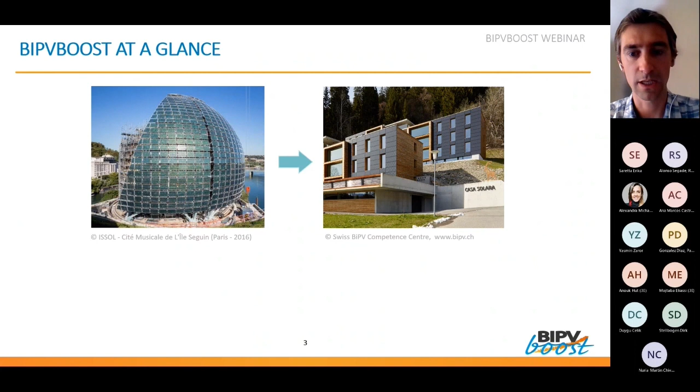So at a glance, what we aim is to move from iconic BIPV towards the mass adoption of the technology in all segments of the construction sector. We have nothing against iconic BIPV, but we are aiming to produce impacts that will allow the adoption of the technology in all segments, not only in this niche segment, but to extend the possibility of integrating photovoltaics in the residential, the commercial, and also the industrial segments.

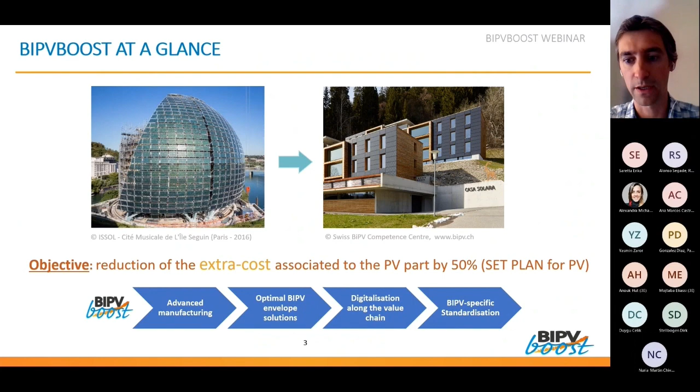The main objective is to reduce the extra cost associated to the PV part by 50%. It is an objective that was set by the SET Plan for PV, and this is the main ambition of the project. So we propose a holistic approach of different cost reduction strategies along the value chain, starting with advanced manufacturing, following with the development of optimal BIPV envelope solutions, the implementation of digitalization strategies along the value chain, and also covering standardization activities for BIPV.

So I will now present the main project results. The first one will, of course, be the flexible manufacturing line for BIPV. We developed a new flexible tabber stringer for crystalline silicon technology, which provided enhanced flexibility in design, high productivity and quality, and ultimately a module cost reduction. We have an automatic string layup, which can accurately and freely position strings onto the module glass. In this case, we can go up to XL formats, 3 by 2 meters.

We have also the possibility of implementing inline quality control strategies at string and module level prior to the lamination step. And we can work in two operation modes, standard and customized. With the standard mode, we can work at a higher speed, but less flexible. And with the customized operation mode, we can be much more flexible at a slower speed, and we can have customized string length. We can play with different cell distances, even inside the same string. So we can deliver highly customized modules at a competitive cost.

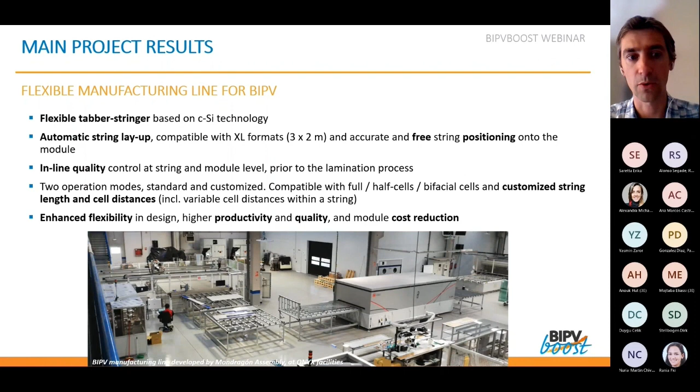The second main project result would be the portfolio of low-cost and aesthetical BIPV solutions. In this case, we have 4 main contributions. The first one on the development of advanced glass-glass BIPV solutions based on crystalline silicon, back contact, and amorphous silicon technologies. We have also the contribution from PIZ, an Italian company, which has developed a multifunctional BIPV facade cladding system with integrated insulation.

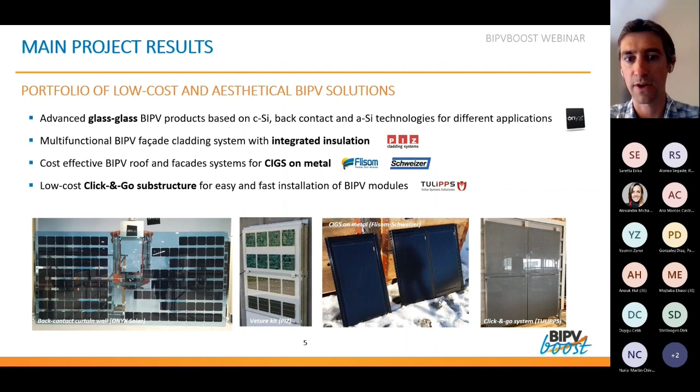Then we have also the collaboration between Flisom and Schweizer, both companies from Switzerland. In this case, they have developed a CIGS on metal solution compatible with facades and roofs. And next, we have the low-cost click-and-go substructure for easy and fast installation from TULiPPS.

Next, we have data-driven strategies for cost reduction along the value chain. This is basically the topic of the webinar today. We will be presenting the contributions from EnerBIM, 3E, Tecnalia, and SUPSI on this field. The first one from EnerBIM on the progress of their software tool, BIMsolar.

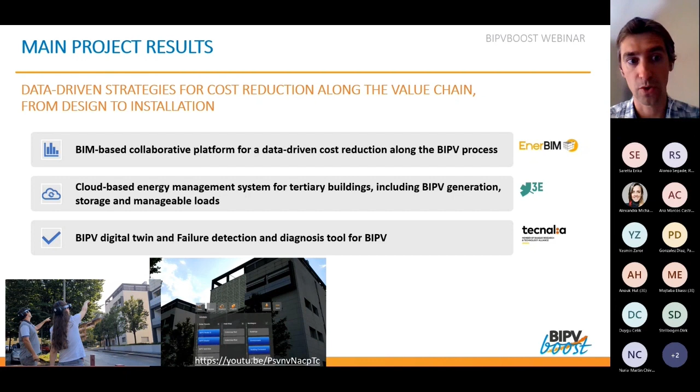The second one, as I presented already, on a cloud-based energy management system for tertiary buildings. And from Tecnalia side, the BIPV digital twin and failure detection and diagnosis tool. And SUPSI will present the augmented reality tool, which was also implemented in BIMsolar from EnerBIM.

Next, on standardization, this was one of the topics that we worked on during the project between SUPSI, Tecnalia, and CSTB. As a result, we proposed new combined photovoltaic and construction testing procedures, including also the development of specific equipment for these testing procedures. And we worked on 4 topics: energy efficiency, energy performance in non-conventional scenarios, mechanical performance, and fire reaction for BIPV.

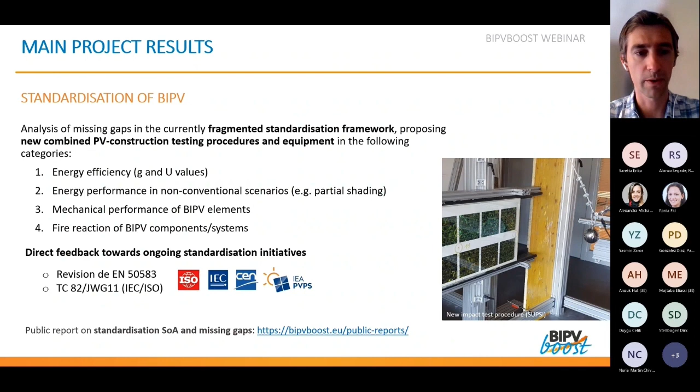As a result of this work, we have produced new testing procedures in each of these topics, and we are in direct contact with ongoing standardization activities. So in this case, we are in touch with all these ongoing activities and are now in discussion, in some cases, proposing the implementation of these new testing procedures in some of these new standards. There's available material in the public repository of the website. I will have a slide on this next.

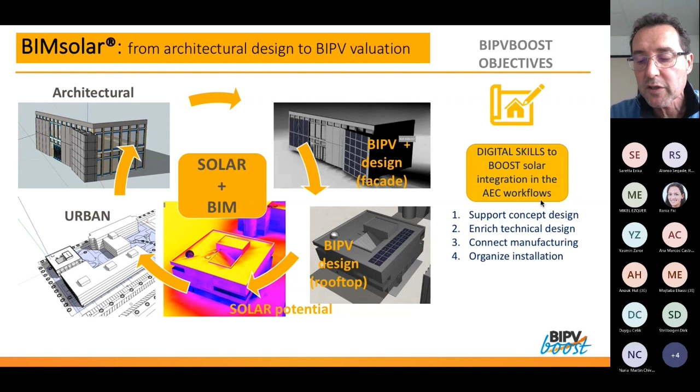The main target of BIMsolar is to be a complete solution dealing with urban values, urban shapes, architectural shapes, and of course solar potential, solar energy, and also digital designing and addressing architecture, engineering and construction. So the digital skills were in charge of boosting integration in the AEC workflows for this project. First, with a huge support to concept design. Second, to enrich technical design, so following the reference workflows for the AEC world, connecting manufacturing, organizing the installation, the preparation of installation, and also anticipating operation and maintenance.

First, to address concept design, we developed in this project a brand new tool, BIMsolar panel editor, a full web solution to anticipate the BIPV performance at element level. So you will be able to discover it at the end of the project online for free. This full web solution enables to create materials, transparent glass, colored glass with cells, variety of cells, density of cells, and representative cost and CO2 equivalent weight, and then connected to the later stages of the process. So this is the first innovation.

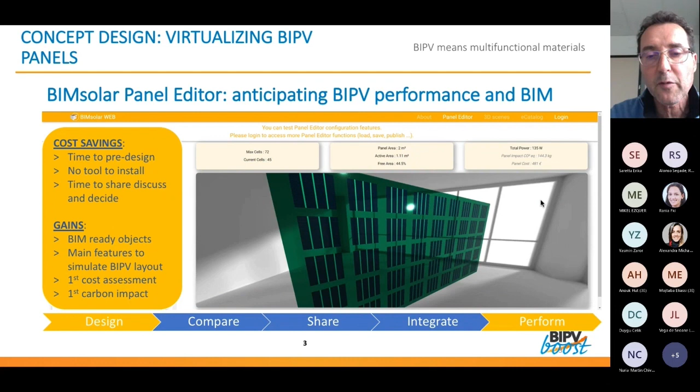The cost savings are, of course, the time to pre-design, the time to choose solution and to compare solution, no tool to install, the time to share and discuss and decide about the choice of materials, and the main gain is to be able from scratch to provide at this stage, the very early stage of the project, a BIM-ready object and BIM-ready catalogs of objects dealing later on with simulation and integration into the BIM workflows. First cost assessment and first carbon impact are delivered at this early stage of the process.

You will be able to find at the end of the project BIPVBoost, so the final delivery will be the official e-catalog of the BIPVBoost solutions as materials and panels, BIPV glasses like bifacial balustrade roof, walkable roof, solar tiles, cladding, insulated cladding. So the catalog is ready and is enriched with these objects and full online.

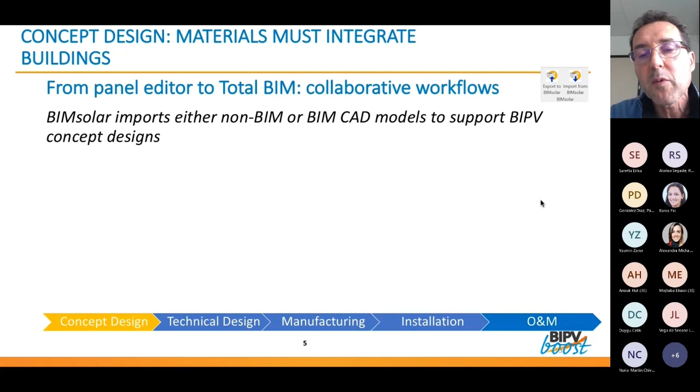From panel editor to total BIM, the collaborative workflows is supported by our desktop tool, BIMsolar, that was enriched during the project. The materials must integrate the building, so BIMsolar imports either non-BIM or BIM CAD models from architecture or urban forms to support BIPV concept design. So the process is in picture of the following. Of course, for this optimal house demo site number 3, we started from the existing roof. We designed with the architect the 3D model. In this case, it was with SketchUp, but also with the Revit BIM solution.

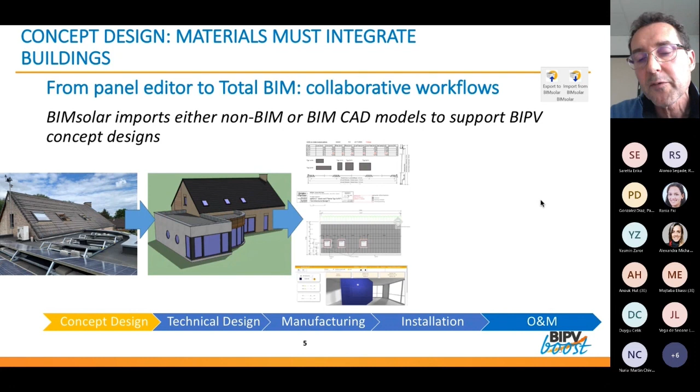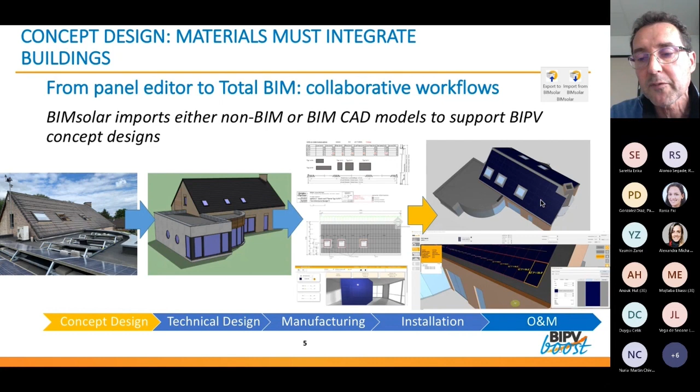Then we gathered elements, information, data to provide the first design of the material, the tiles, CIGS tiles, and then we replicated and simulated the roof with all the key performance indicators to assess the performance of the installation at concept design. So a lot of data, a lot of information gathered in this very early and critical stage of the process. Step by step, BIMsolar desktop enriches the design in 7 steps.

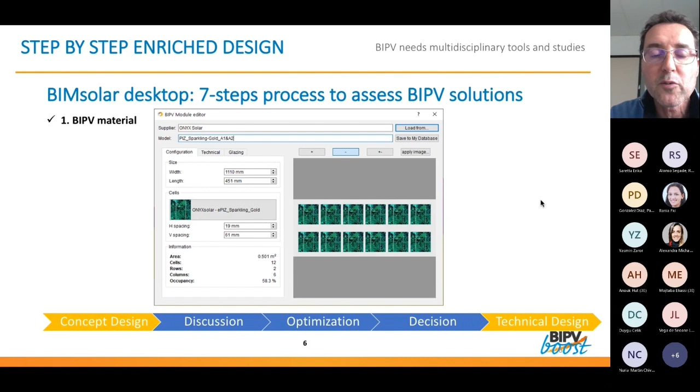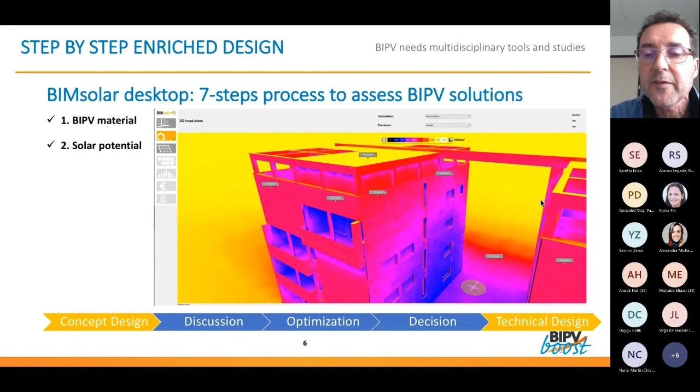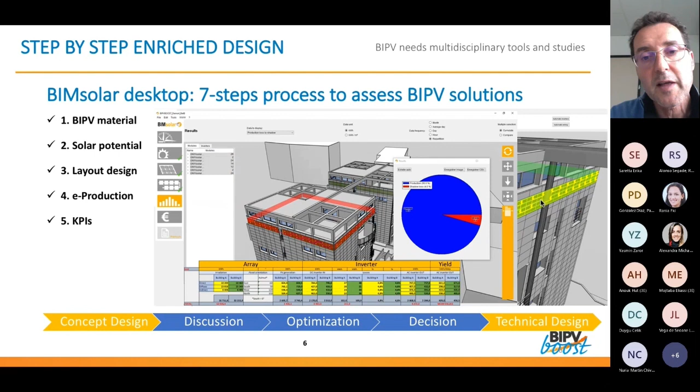The electrical production, connecting strings to MPPTs and inverters, and dealing with all possibilities of stringing and comparing strategies to avoid mismatching effect, for instance, and then the KPIs and a good possibility to optimize and to deal with scenarios like self-consumption scenarios, because we will feature at the end of the project the first prototype of the optimizer engine from Optimal and the Edge HP heat pump consumption model from EURAC.

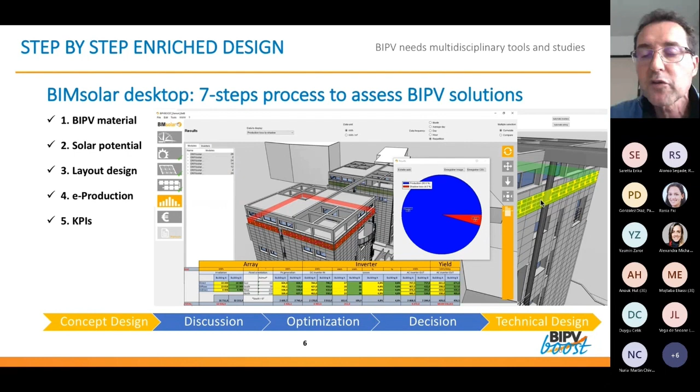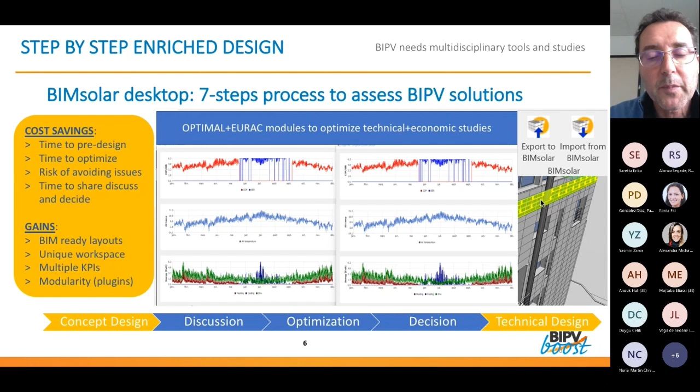So all is connected in one software, connecting panels, materials with the architecture, the 3D model, and you get the results. And this is new, and this was the main achievement of this project, dealing at concept design with the maximum value and also replicating the BIPV enriched model to the BIM solutions. The cost savings are still important in time to pre-design, to optimize, and the gains are mainly BIM-ready layouts, because all that you can see here is replicated in the main BIM solutions, private BIM and open BIM. And the unique workspace saves time and gains in collaboration, of course, and delivery of multiple KPIs.

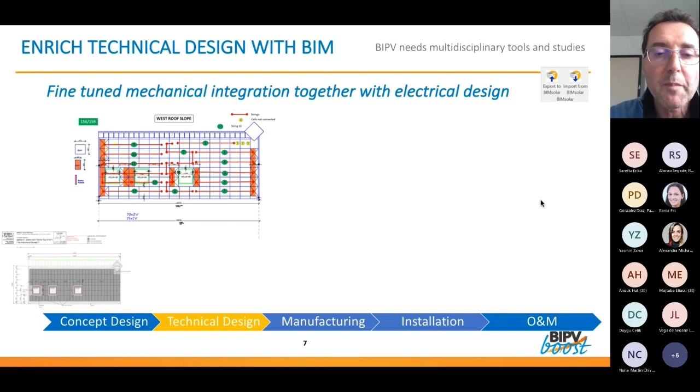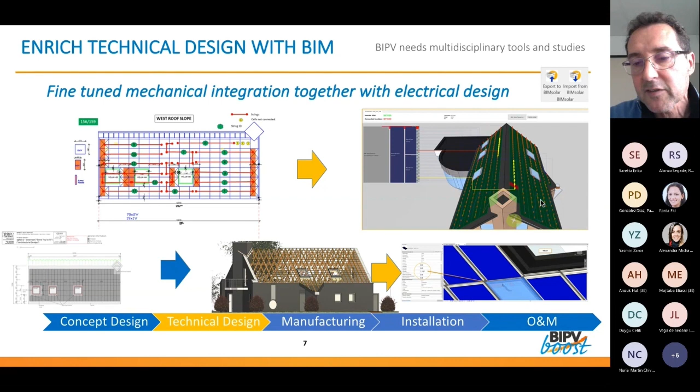The technical design is fine-tuned in the solution from, of course, traditional methods, dealing with a lot of variables, data, but enriched with BIM and 3D designing, 3D modeling, always dealing with high accuracy and a lot of parameters that you can see on the picture between the element level and the building itself, all in virtual, because BIPV needs multidisciplinary tools and studies as a multidisciplinary, multifunctional material.

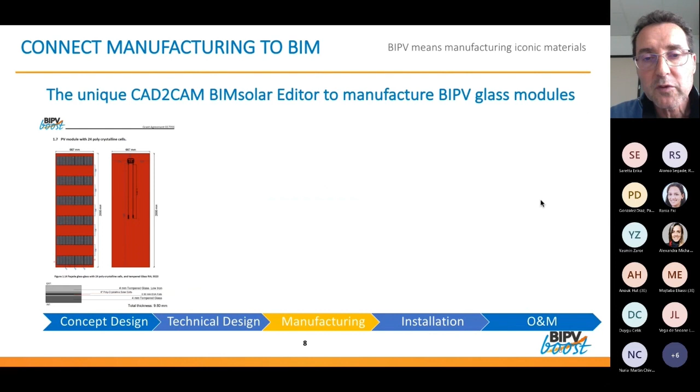Another achievement in this project was to build a unique CAD-to-CAM BIMsolar panel editor to manufacture the BIPV glass that was designed in the same time that the BIPV project was designed. So we can see on this picture that we are analyzing the traditional datasheet from the manufacturer, the producers of BIPV glass.

For instance, this is the Demo 2 glass from Onyx Solar, red glass with a large choice of positions in cells, rows of cells, and then we built a tool able to read the data and translate the data into machine language to launch the fabrication line directly. So it's a kind of design to machine tool. And this was a great ambition. And now we have the first prototype.

Of course, it's highly specialized. It's not a very public tool, but it's connected also to the BIM workspace. So cost savings are here again: time to pre-design, time to optimize, and the risk of avoiding issues with manufacturing. And of course, no delay to share a design with a manufacturer process.

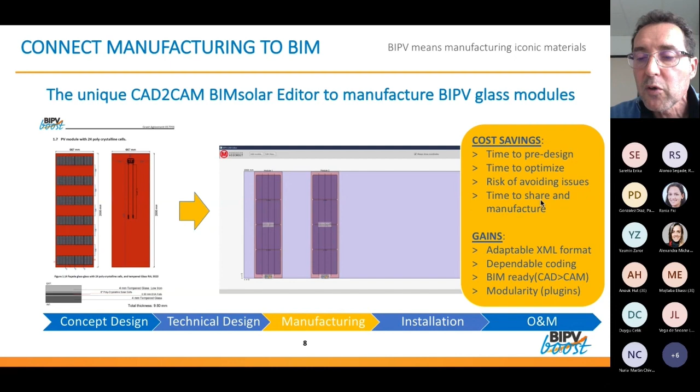And the gains are an adaptable XML format. This format enables the adaptation to every kind of situation of manufacturing, because it's a very easy to handle format. It's not very specific, so you can afford a dependable coding. And of course, you keep the BIM readiness from CAD to CAM.

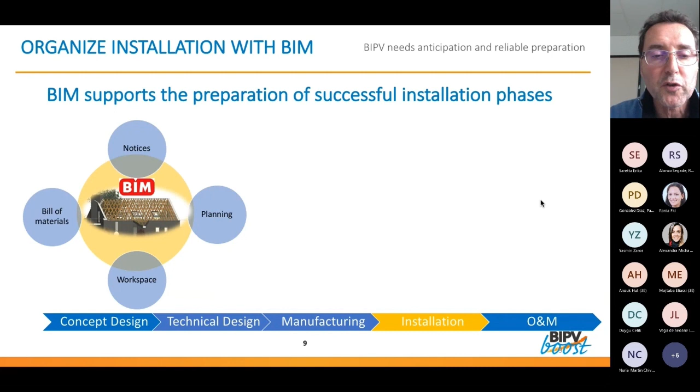Installation with BIM is a question of organization. So this is more traditional, but we supported one demo site in this way, the Optimal demo site in Belgium. We made a full modeling with a BIM tool, Autodesk Revit, that proves that we are able to handle, of course, 3D modeling and dimensions and lots of data between panels,

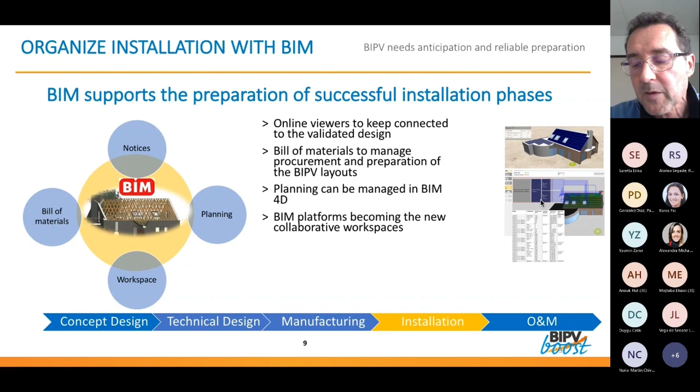electricity, wiring, electricity features, but also the management of a planning and the fourth dimension of BIM, which is time. So the BIM platforms are becoming the new collaborative workspaces, and this is useful and very appreciated to support the preparation of installation of complex BIPV layouts, because you can attach to the BIM model notices and guidelines, and then you can gather all the information in one workspace, and it's a collaborative workspace.

And you can use also 3D viewers, so non-sophisticated information online, but 3D viewers to organize the works on site. And you can report clash detection and report, of course, the contextual issues in real time from the works to the back office.

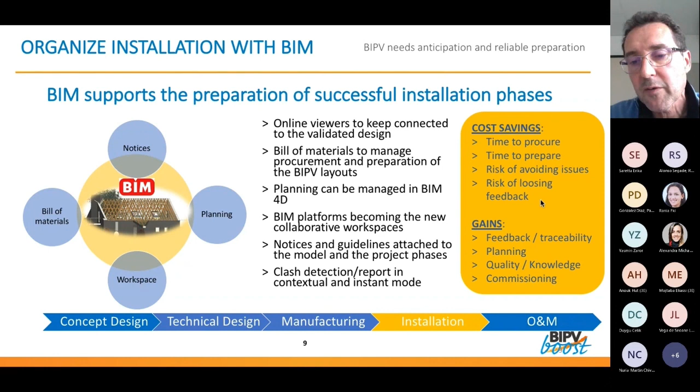So a lot of cost saving in time, in risk mitigation, and gains in feedback, traceability, planning, quality, knowledge, and commissioning, because the models are saved, the projects are saved, and you can access the model online or as a desktop solution with all the enrichment of data, leading to the last achievement we made in this project, the connection of the BIM tools and BIMsolar in particular to digital twin addressing operation and maintenance for BIPV.

So together with Tecnalia, presenting the tool in more detail after me, we are able now to translate a BIPV project from design to construction to operation and maintenance through a kind of simplification, because there is no more the need of a complete 3D, but a more analytical model able to feed routines, analyzing failure modes, and detecting the effects of these failure modes.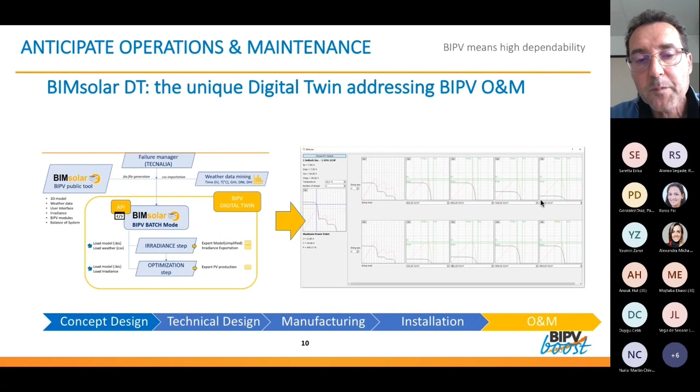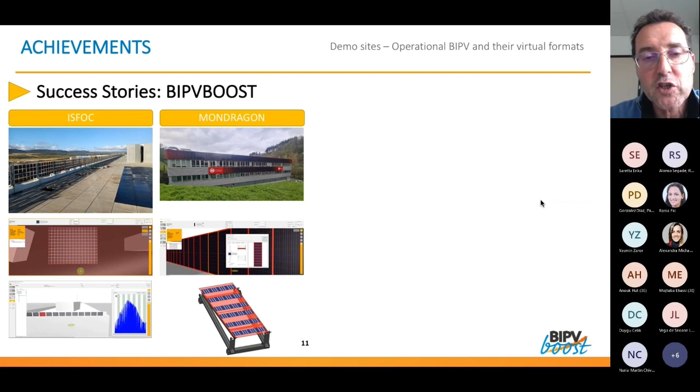Success stories in this project are the demo sites, because we designed, co-designed and developed the virtual significance and connected simulation of each demo site. So you can see ISFOC, Mondragon, Optimal, and PIZ, with modeling in 3D, modeling at element level, innovation in developing families of complex objects like the tulips plus Onyx Solar glass family in Revit,

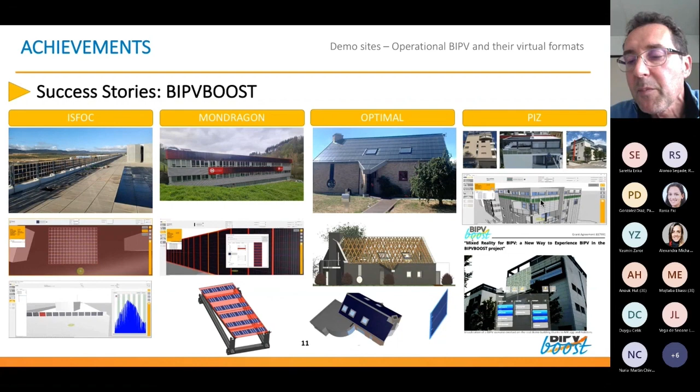And last but not least, we also developed for the PIZ building a virtual mixed reality effort and proof of concept, enabling making choices in front of a building with a large variety of modules and solutions applicable, overlapping on the facade, for instance, in this case. Success story in an open market to finish: the software is used by normal users, not only in the project, but for big or normal projects.

The biggest project today is the Olympic Games swimming pool in Paris, with a complex 3D roof with BIPV panels, not simple BIPV panels, but complex BIPV panels, and sophisticated BIM, and also normal projects like schools and atriums, for instance, on the right of your picture.

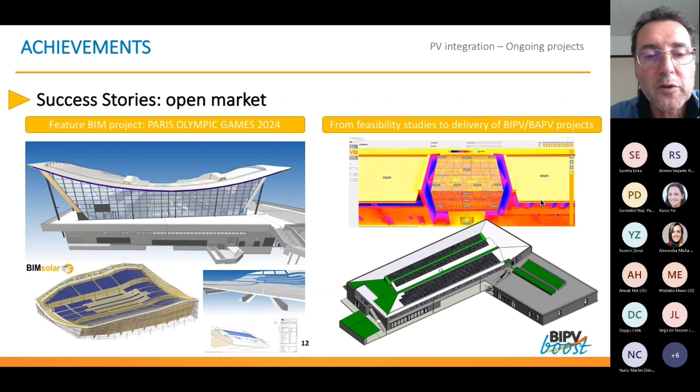As a conclusion, I would say that BIM and the BIM tools are a new paradigm to boost the architecture, engineering, construction, and PV integration, because it can join the traditional processes with a lot of innovation in 3D and in data creation and data gathering, of course, and data exchanging.

Autodesk runs the market with Revit, so it's difficult to avoid Revit, even if we need to go open BIM, of course, but this is not a barrier, I think. So we are developing technologies to be compatible with Revit and compatible with the open BIM, IFC in particular, of course.

BIPV has to BIMify, we think, since the first concept design, because concept design is very critical, with a lot of data, lots of choices to make, and BIM is a strong support to save time and to mitigate risk. Parametric objects are a good opportunity because of their multifunctional character, like the BIPV modules are today, adapting to the contextual situation of the design.

And there is a fantastic potential of savings and gains, because even if the interoperability between tools is still a challenge, the digital workspaces and the teams are progressing and the databases are compatible now. So we can progress a lot and we can prove it in this project.

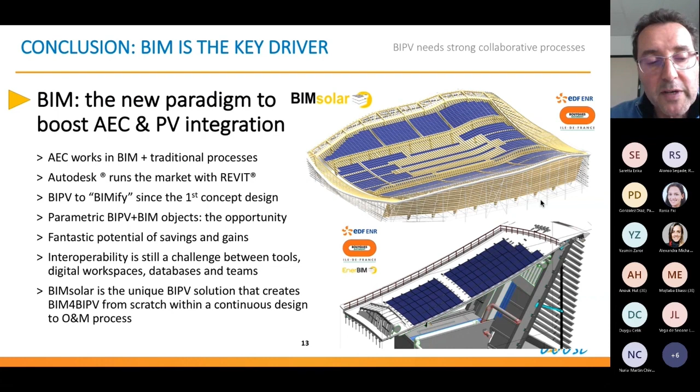So at the conclusion of the conclusion, BIMsolar is today the unique BIPV solution compatible with the tools and the formats, creating BIM for BIPV from scratch, because we can create the modules online from scratch, connected to the architectural works or the urbanistic values, with a continuous design to operation and maintenance process.

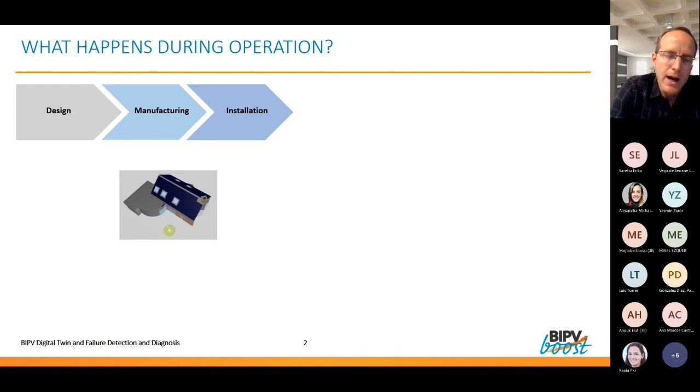In the previous presentation, Philippe presented what digitalization can provide during the design, manufacturing, and installation stages. And now we are going to see what happens after the commissioning of the PV plant. Can digitalization also help us during the operation of the system to improve the profitability of this kind of systems? Obviously the answer is yes.

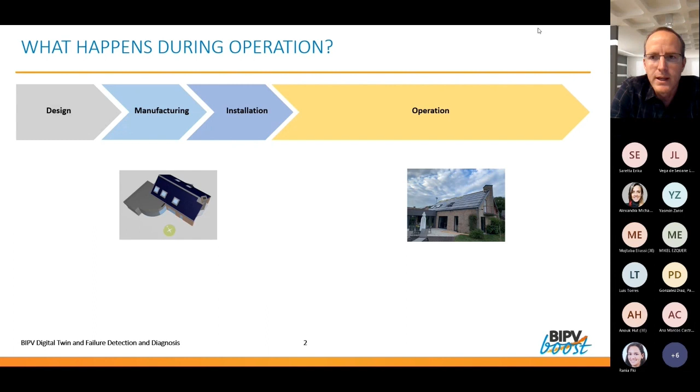We have to take into account that at this stage there is a new data source that is huge: the monitoring of the real performance of the system. And if we apply suitable data analytics techniques to this, we can improve the BIPV model developed in EnerBIM to represent more precisely the real performance of the system. This way we can detect potential anomalies in the system and trigger alerts warning about failure appearance.

Of course, this will lead to better operation and maintenance, because we will reduce the cost of operation and maintenance, as in this kind of systems the inspection techniques on field are quite expensive. And on the other hand, we will improve the performance ratio, because otherwise some failures will go unnoticed.

Apart from this, if we also feed this enhanced BIPV model, representing more precisely the real performance of the system, with weather forecasts, we could offer a more precise BIPV forecast. That is essential in order to implement a predictive building energy management system that will try to get the most from the BIPV production for the profitability of the system. This will be the scope of the next presentation.

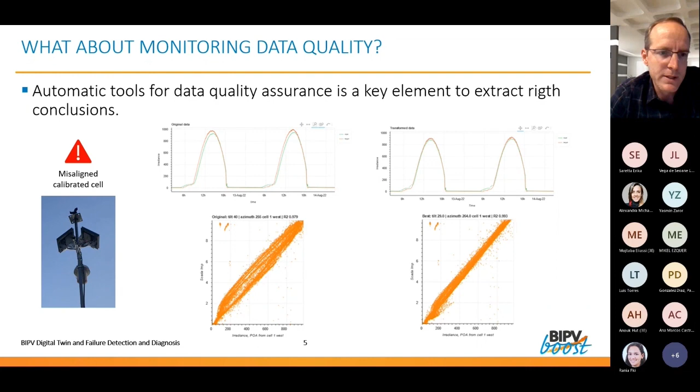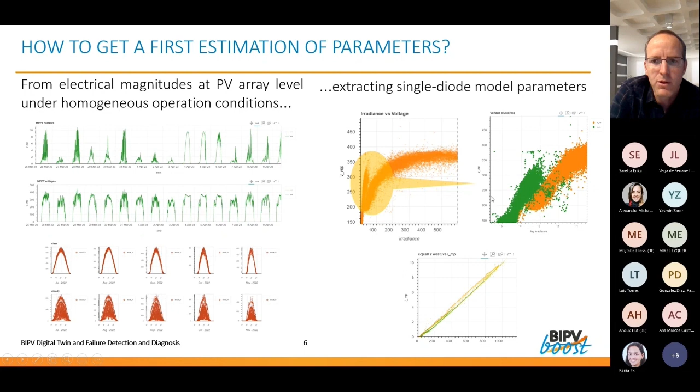voltage and currents. For instance, if we analyze the voltage, we can, with the suitable clustering method, distinguish between the open circuit voltage, which will give us a lot of information about some particular failure modes, and gives us the parameter for the open circuit voltage in the single diode model of the PV modules, and on the other hand, the maximum power point voltages. And the same for the current. As you can see here, with all the filters, we have obtained very good correlation between the irradiance and the maximum power point current.

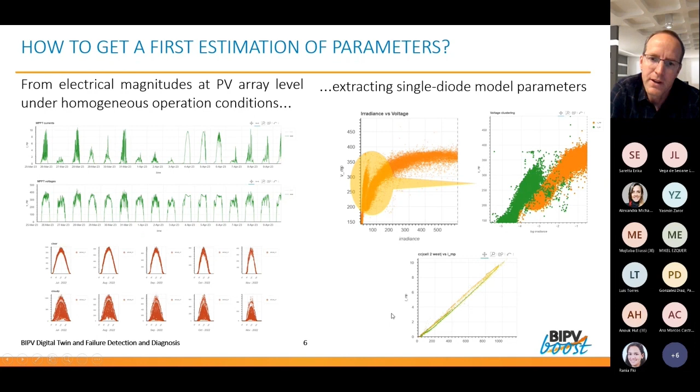So once we have this first approach of the parameters of the BIPV model, then we run automatic optimization techniques to reduce the distance between the real monitoring data and the output of our BIPV model. For this, we have to define some metrics in order to analyze this distance, this divergence between both data sets. And the relevant aspect here is that we also include the heterogeneous conditions that will give us information about potential heterogeneous degradation in the system.

So we are working at PV string level or PV array level from the voltages and currents measured by the PV inverter. But for instance, in this roof that is west oriented, there are moments in the morning when part of the roof is shadowed. So the BIPV model will give us information about which PV modules are shadowed and which are in the sun. And from the voltage measured at this instant, we can distinguish between the contributions to the voltage of the different modules. So in spite of having only information at the string level, we are able to distinguish effects at module level.

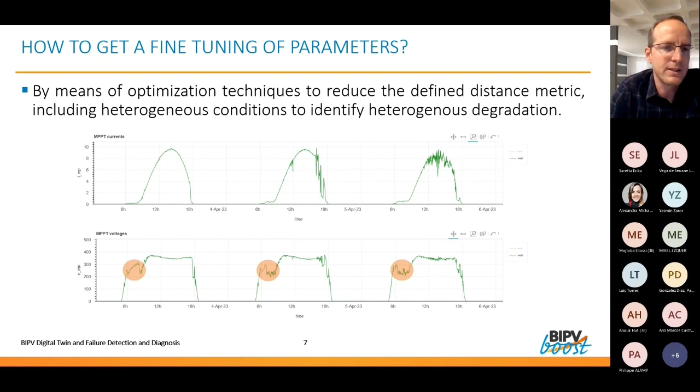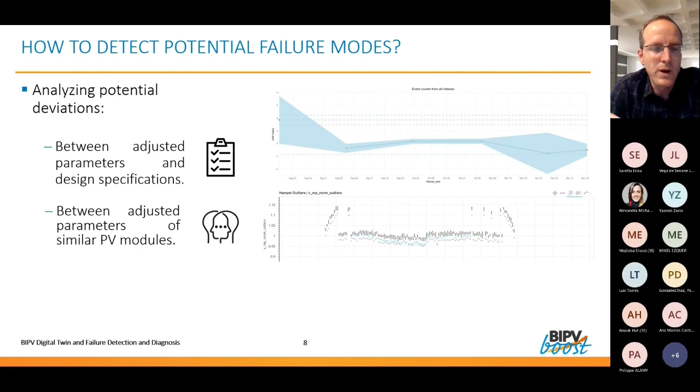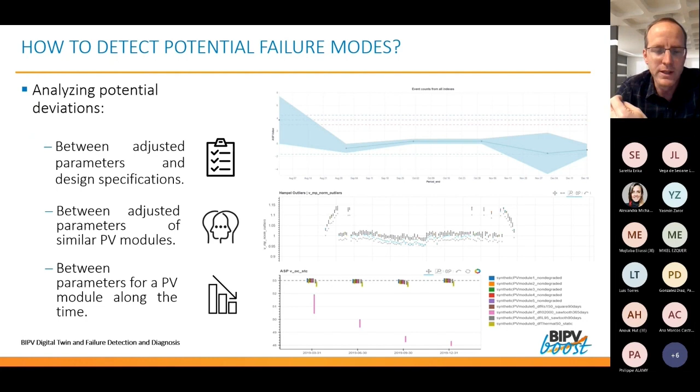Finally, how do we detect the failure modes? Well, at the end, we analyze the potential deviation of these parameters that we are calibrating. So once we have the BIPV model calibrated and fitting the real monitoring data we are measuring in the field, we analyze the potential deviation between the fitted parameters and the design specifications on the one hand, on the other, between adjusted parameters of similar PV modules, and also how these parameters evolve over time. And if we see significant deviations, we will trigger an alarm.

Apart from this, once we have this detection, the different failure modes will have different footprints on these parameters. This means that they impact differently the different parameters we are calibrating. So we can distinguish between the different failure modes and the root causes, in order to recommend some operation and maintenance actions to the demo owner.

So to conclude, what have we learned so far? First of all, that the BIPV digital twin shows a great potential for early failure detection and diagnosis. This is evident. We have detected that there is a high impact of the data quality and also operating conditions. That means that if we always have shadow conditions or always cloudy conditions, it's more difficult to get the right conclusions from these data sets. But in order to avoid these issues, we have developed automatic tools for input data filtering and quality assessment that are working quite well.

Then the fine-tuning of parameters after this first estimation we did is not a straightforward question, and it can be improved by means of new metrics and procedures that we are working on.

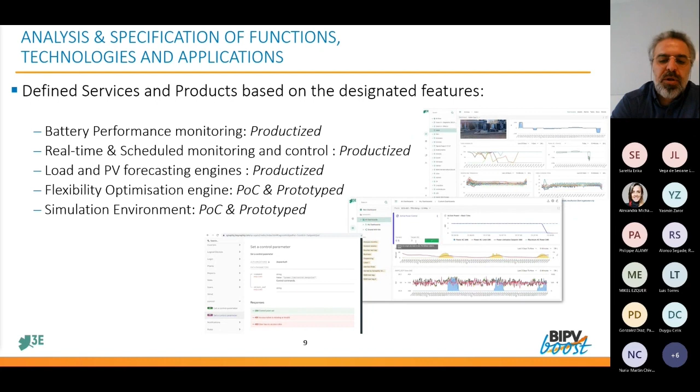So we decided to take a methodological approach to analyze and specify different functions, technologies, and applications that we need for the BIPV Boost project. I have listed different products that we have worked on: battery performance monitoring, real-time scheduled monitoring and control, load and PV forecast engines, flexibility optimization engine, and finally simulation.

Thanks to these new products, we achieved some new KPIs as well. We want to compare what we have today and what we had previously. We achieved granularity of 5 seconds and an update rate of 5 seconds, which were 1 minute and 5 minutes before respectively. The response time to control signal is mostly less than 30 seconds. There are some spontaneous responses as well, considering different power plant controllers that we have on site.

And we also needed a better security posture. And thanks to CloudGate, we deployed a new client-server certificate-based security enhancement. SynaptiQ API is sending the certificates, server certificate, to the BIPV API, which is communicating with the CloudGate device. And after confirmation and validation, the client app actually sent its client certificate.

And thanks to CloudGate, integrated with BIPV API at the edge level, we have a stable, scalable, remote, and reliable solution.

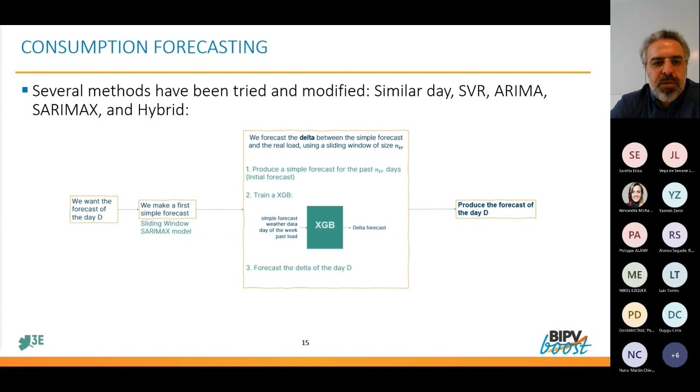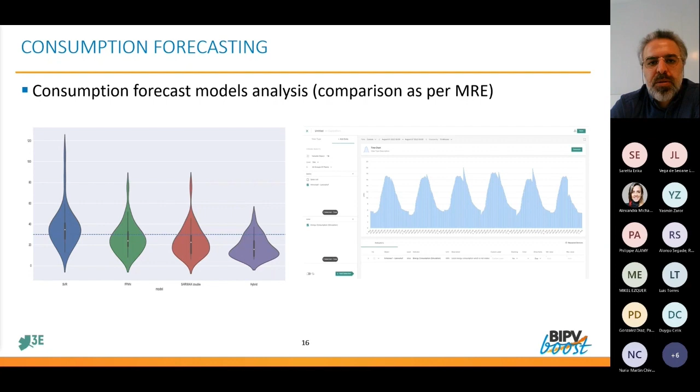So here you can see some results, the way that we could improve our consumption forecast by using a hybrid method. And then on the right side, you could see the productized forecast of SynaptiQ. Also, PV production forecast, in line with what Ricardo mentioned for the digital twin.

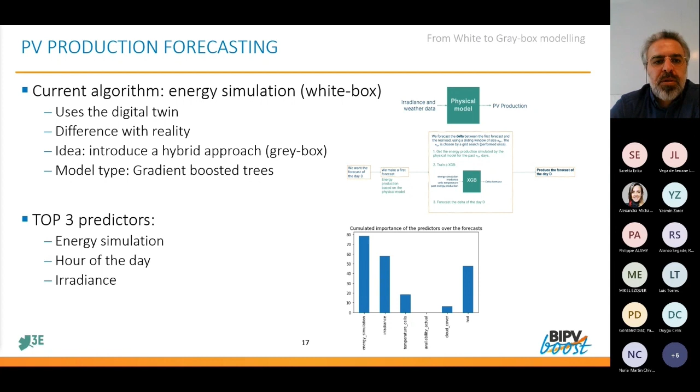Actually, we had a very well-developed digital twin for PV. We have been working for years on that, but then we decided to move from the white box model that we are using currently to a gray box model. So again, using gradient boosted trees for BIPVBoost, we tried this new methodology over different sites in SynaptiQ, and here you could see some exemplary results and the way that we improved our forecast.

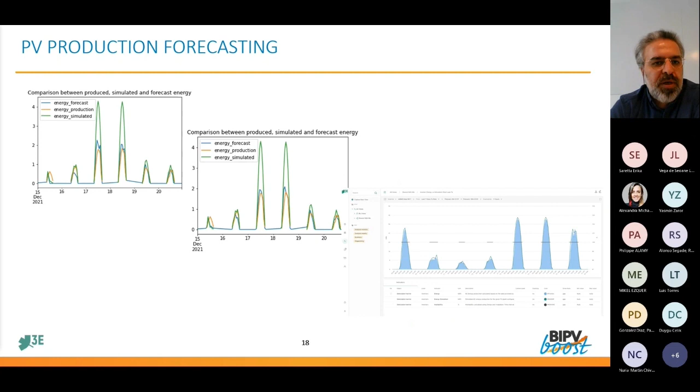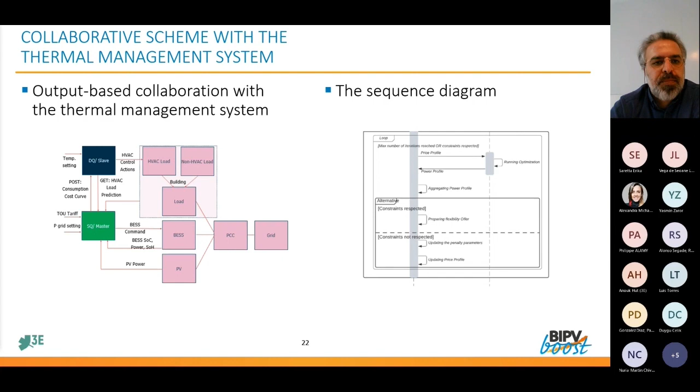And you could see here the collaborative scheme and the sequence diagram between Delta Q and SynaptiQ in order to achieve this cooperation. And finally, to give you a visual presentation of the result, you could see here in three different use cases: baseline, separated energy management systems and combined energy management systems, how the comfort could be preserved and the battery could be rescheduled to get coordinated with the HVAC consumption.

In that case, we are stacking different, let's say, value propositions from thermal inertia of the building, from the battery management system, by leveraging local PV production and using time of use tariffs.

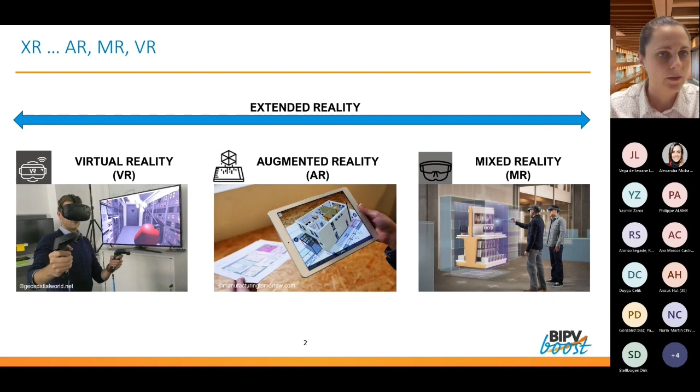And saying that, this technology can radically change the architectural and construction sector, since different stakeholders can get immersed in a virtual project during the various stages of the bidding process. So we have different applications, but also different benefits regarding visualization, communication, but also training and project management, construction management, site safety, and so on.

So what about photovoltaics and building integrated photovoltaics? So far, these technologies have been applied to PV for planning projects, for training, for maintenance. But what about specifically BIPV?

So if we consider the whole BIPV process, you know that there are different process stages, starting from the strategic BIPV planning. Then we have the conceptual BIPV project, technical BIPV projects. Then we have finally the installation, the O&M, also through digital twins. And then we have the end of the life of our project, that is dismantling and recycling.

In this project, we focused mainly on the conceptual BIPV project stage, because typically this is a stage where we have iterative design, where a lot of efforts are spent by architects and consultants to investigate different BIPV solutions, for sure, but also to communicate efficiently the BIPV projects and its characteristics to clients. And we have to consider that usually clients are not used to 3D drawings and 3D representation of projects.

So we investigated the most important data and information to be included in these new technologies. We tried to involve not only partners within the consortium, but also external partners, so stakeholders outside our consortium, to get the most important aspects. And it arises that we have different priorities, and we noticed that

highest priorities concern PV production, PV yield, so not very detailed information, but mainly we need to provide BIPV module geometry, BIPV module colors, customizable options. So we need to focus our attention on aesthetical appearance.

Later on, there are for sure also other aspects that involve the solar radiation, the building geometry, the sun path, shadings, and so on, but also the costs, the extra costs, value about payback time, life cycle data, and so on. But we have at least this overview of what concerns the BIPV stakeholders the most.

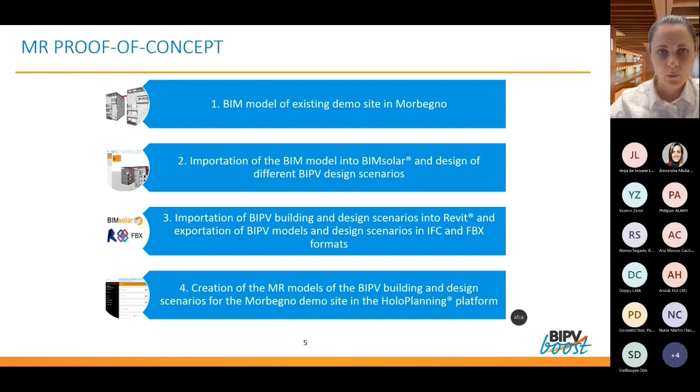And indeed, at the end, we created these models and we included them in this AFCA web platform, which also includes georeferencing features. So this is the workflow, and I'm going to show you the result of the implementation of this workflow. I'll try to.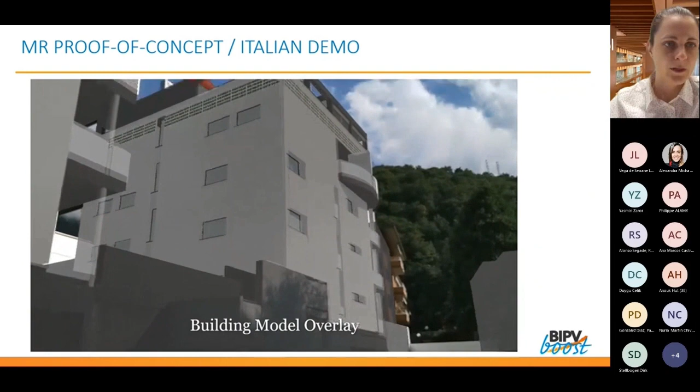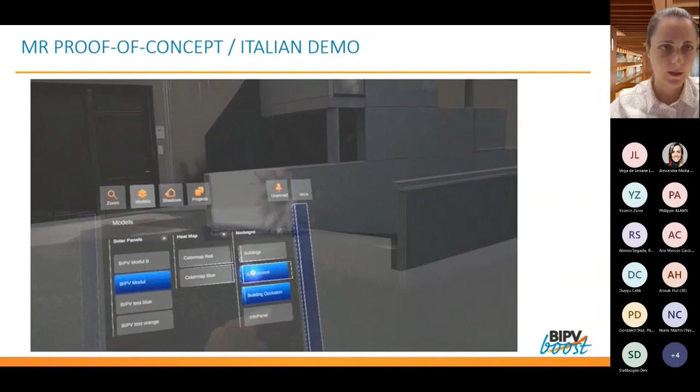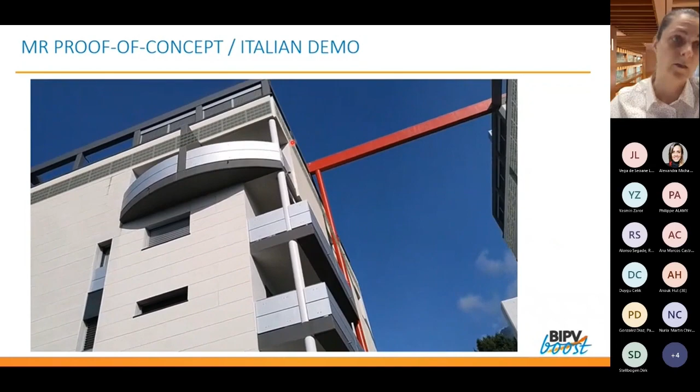So as you can see, this is a view from the user who is using mixed reality. You can see that the building model made in BIM is overlapped to the existing real building, thanks to the georeferencing. Then with hand controls, you can visualize only the digital model about BIPV. You can see on the top of the building BIPV modules that have been developed within the BIPV Boost project.

And the peculiarity of this technology is that you can move and walk around the building, and the BIPV solution remains, let's say, attached to the building. The virtual BIPV solution is attached to the building. You can see these modules that are made of green, gold cells with white background, but you can also change the design solution.

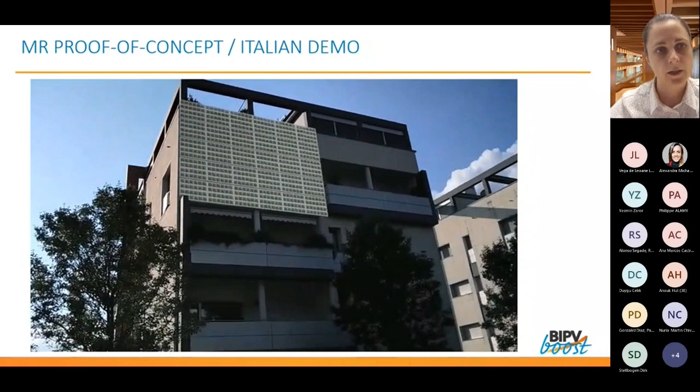You saw that we changed the appearance of the proposed solution. And different stakeholders can visualize the same model in real time, so you can discuss with the client the different BIPV solutions and also the most feasible ones.

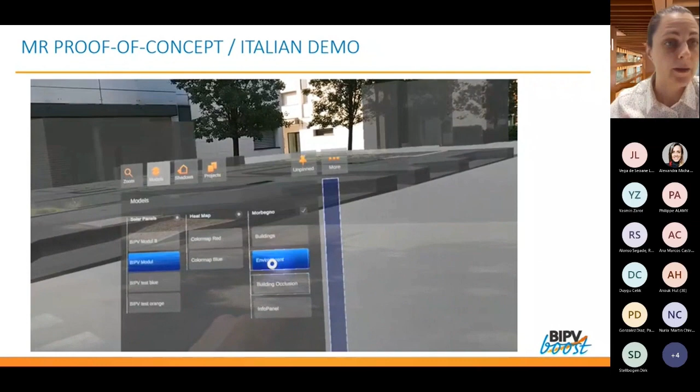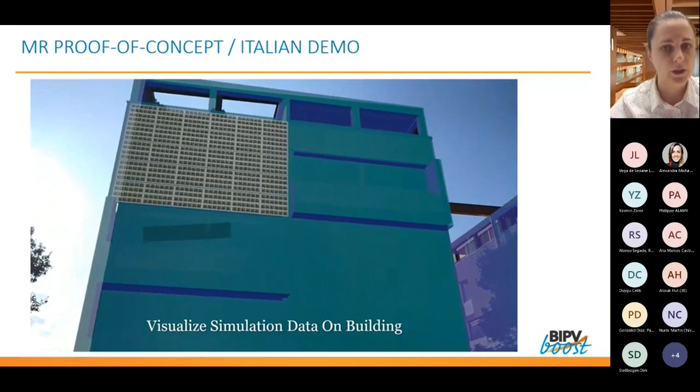Then with the client, the architects or consultant can showcase also the characteristics of the project, the BIPV module characteristics, and so on. So you have different options to better communicate what you have developed. And finally, you can also integrate data and color maps representing the simulation, or also in the next stage, we could also integrate shading models and shading

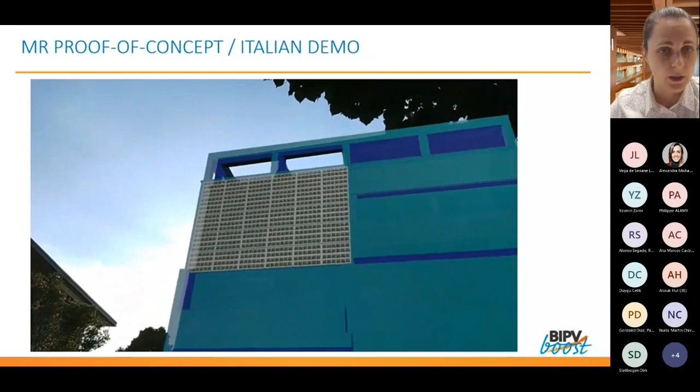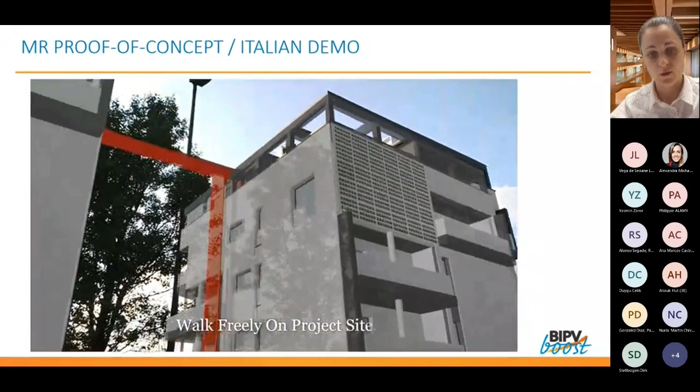information. So let's say that in this way, also people who are not used to 3D representation, that is very common in clients, can really be aware of the final result of a project. And this can definitely improve the communication and reduce also the misunderstandings with clients, building owners, so that we can really go for BIPV and support BIPV implementation.

So with this proof of concept, we noticed that there is large potential for BIPV, and for sure there will be further developments such as the improvements of the background workflow with MR and BIM, but also the idea of extending this experience also to other devices. But we are quite sure that this technology could support the improvement of the iterative conceptual design stage, supporting a positive decision by the client or building owner.